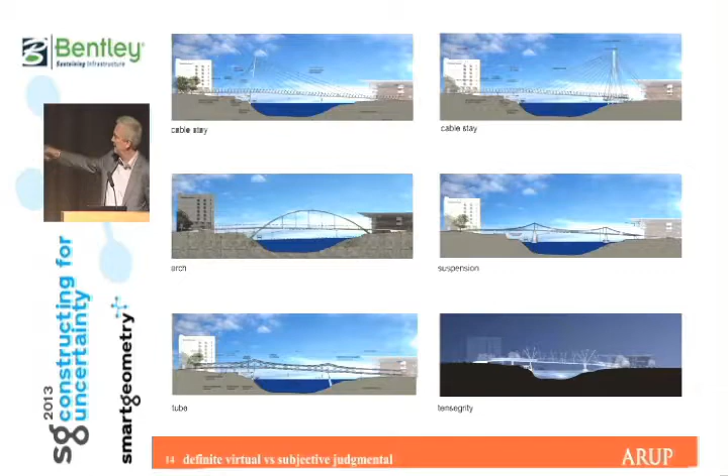So our team, Cox, Arup and Baulderstone Hornibrook, we looked at all these different options in front of you, and we said, well, it's a design competition, so we're not going to do the ordinary things, we're going to do something different. But we're going to do something different that is only going to cost $60 million. And we decided, because we'd been recently thinking about it, to do this tensegrity bridge, as we called it, on the bottom right-hand side. As a structural engineer, it's quite difficult to do something with tensegrity because it is inherently ineffective.

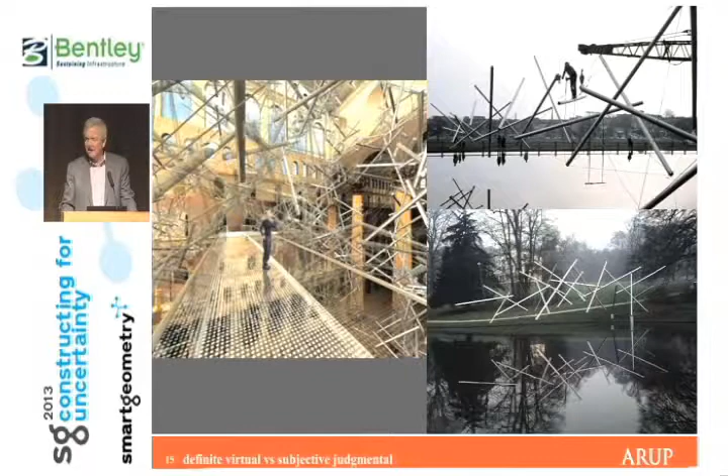Now, if you look around the history of tensegrity, you can see some sculptures, but that's about it. Because actually just getting a sculpture to hold itself up is pretty difficult. So it's a slightly odd concept to try and design a real piece of urban infrastructure with. So again, we cheated. The top diagram is actually our bridge. It's simply a cable-stayed bridge, using two pylons in the river.

But then we added a set of structure you can see in the middle of this diagram, which is a whole other set of masts and cables. And you could say, well, all you've done is decorated your bridge, and to some extent that's true. But it's not quite true, because we've halved the span of the deck from 24 metres to 12 metres, which reduces its thickness from about 1.5 metres to 900 millimetres.

And in modern pedestrian bridges, you have to deal with disabled access. So you get a ramp of about 1 in 20 to get up onto a bridge and get down. And if you save 600 millimetres in the middle, you save 20 times that bridge length at each end. So it's not the direct saving in the middle that we get from this extra bit of structure, but it is what we get at the end.

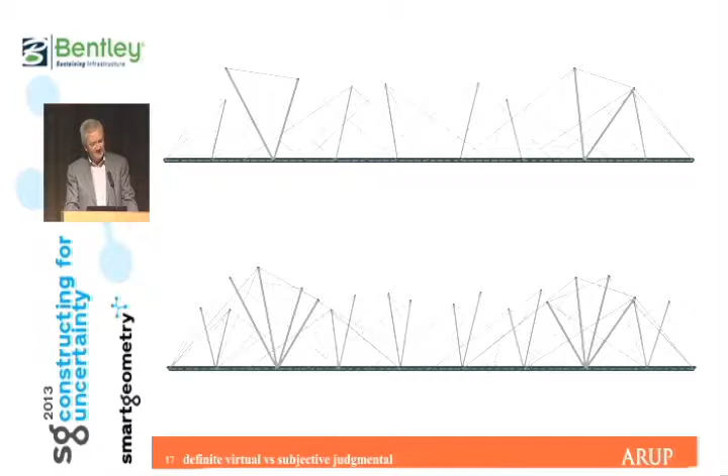The next step was we put the two together at the bottom. You can still probably see a regular pattern. You can see certainly where the cable stays come together. But if we go one step further and start using random numbers and inclining everything so it's not in its usual vertical place, your loss of efficiency if you incline by up to 15 degrees is about 4%, which probably doesn't change one tube from one size to another. So it probably doesn't make any impact at all.

And by doing different random patterns on each side of the bridge, which you can see in the bottom of this slide, you get a three-dimensional sort of fuzziness about it. You're now beginning not to see the major pylons compared to the major masts compared to the minor masts. So it's all sort of sleight of hand, if you will, here.

The funny bit to me is the only digital bit I did was during the competition. I wrote a spreadsheet that generated random numbers and used it to incline the columns and change their height slightly as well. And once I'd done that, we never changed them. That was it. There was no more digital exploration. It was done once. It worked. And we went ahead and built it.

There's a bit of pure tensegrity, which is there are horizontal struts that support the canopy to protect the people and also keep the mast stable in the other direction. Because the idea of tensegrity, for those who are not familiar with the work of either Buckminster Fuller or Kenneth Snelson, depending on who you think invented it, is the idea of compression elements floating in a sea of tension. So the idea is that the struts don't touch each other. And that's what actually makes it very inefficient.

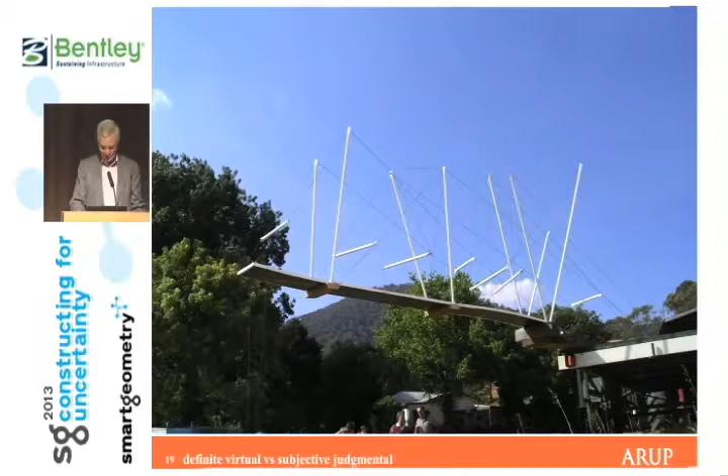What amazes me, by the way, is Buckminster Fuller persuaded the world that tensegrity was the most efficient structure on the planet, and he was going to construct whole worlds in the sky based on it. I still don't understand how the whole world thought he was right. It is quite an amazing confidence trick. He's a brilliant bloke, by the way, don't get me wrong. I just think that particular aspect of what he put forward was amazing. And we had done the same thing to some extent.

On our judging panel, working for the government, was a quantity surveyor whose job was to make sure that even the builder wasn't cheating and it really could be built for the money that the government wanted to spend. Now, this quantity surveyor looked at our project and actually decided it was the cheapest submission that was made. But he also decided it didn't stand up.

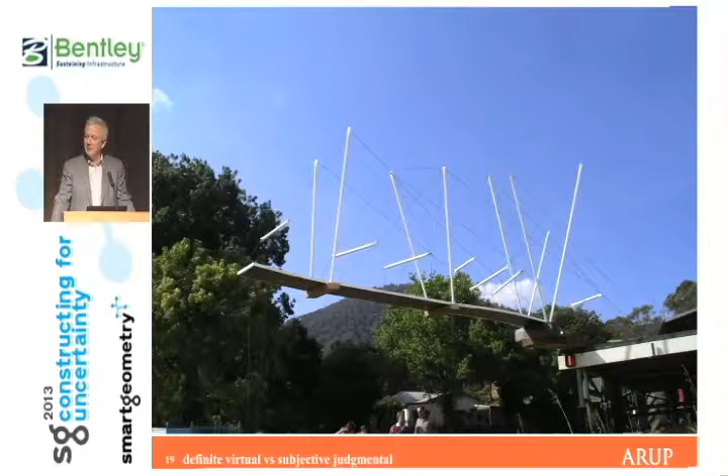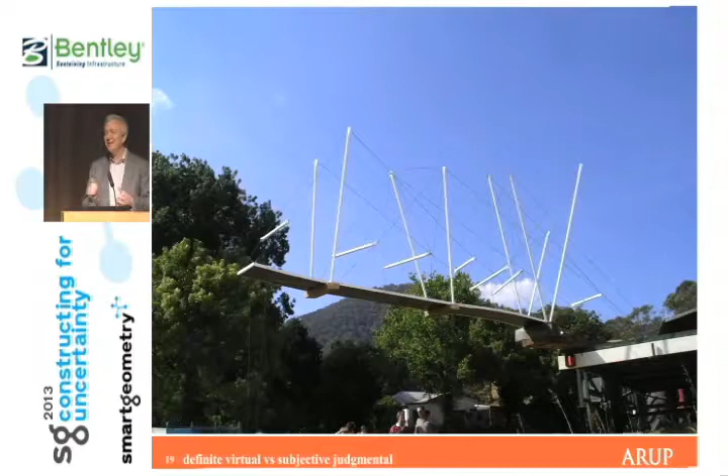Luckily the entries went in before Christmas and the judging was made after Christmas. And Christmas in Australia is a big summer holiday. So he went off to his hobby farm over Christmas and he built this model using his own money on his own farm to make sure that he wasn't going to recommend to the government to build a bridge that wouldn't actually work.

So it's the first time ever, I think, a QS has gone to such lengths in a physical world. So there's the bridge that we built. I think it's very successful. I think one of its lovely things is it polarizes opinion. I'm told that people on the CityCat, as they pass underneath it, they either love it or they hate it. They don't come halfway in between.

When it opened, it was the 150th anniversary, as it happens, of the first tall ships to arrive in the Brisbane River. And so you can also see unwitting references between what we constructed and the original tall ships. This is a sort of side point.

Almost everything I've been involved with since 2003 has had LED lighting using infinitely addressable colours and dynamically programmable. And all the pictures we take are stills, and they show it in some beautiful, calm lighting that the architect maybe first envisaged. Of course, anybody now can reprogram the lights and make it look as hideous as they want. And this is common now across a lot of buildings. There's a whole new profession required, which is providing the content, if you like, the artistic content for lighting systems.

So manufacturing, and it's a moot point to me. Will we manufacture buildings and assemble them on site? Or will we move the manufacturing capability to the site? The former is where all the action is that I see. We've got people like Unitized Building down in Melbourne putting together apartments complete and fitted out in the workshop. We've got Laing O'Rourke here, mass producing custom made concrete panels and assembling them complete with their services and putting up 40-ton pieces at Leadenhall, for example.

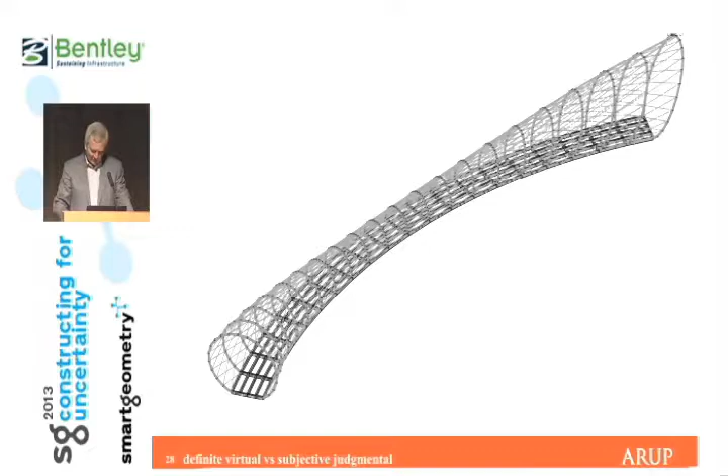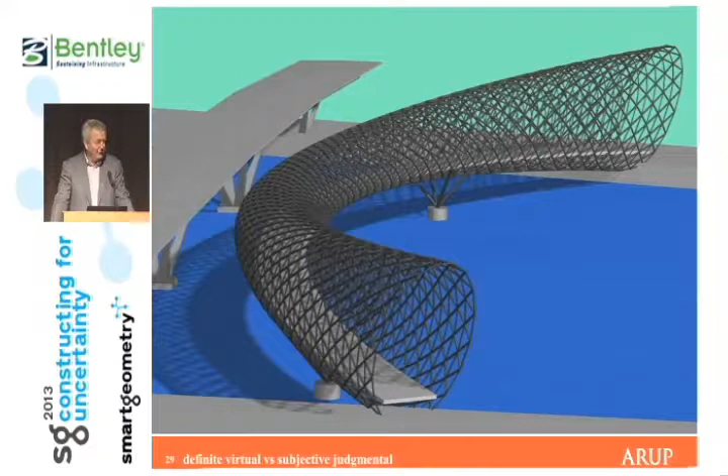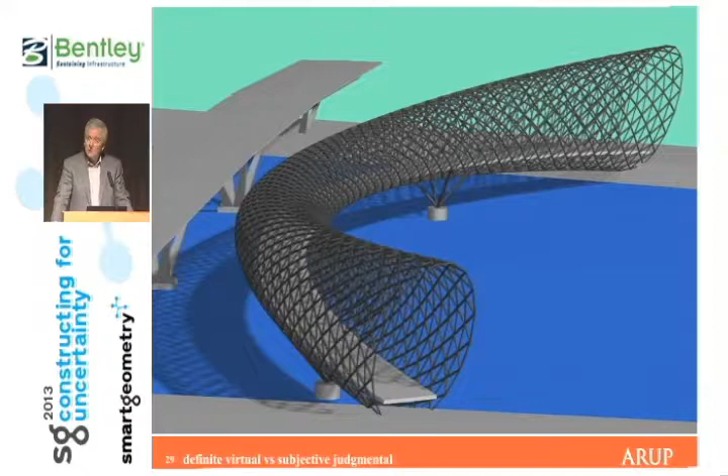So Philip Cox and I said, well, that's okay. We'll just make it out of a compression tube instead. Similar idea. We'll walk through a tube. You actually get into a structural conundrum when you try and do delicate compression tubes. If you make them a bigger diameter overall so that they're more structurally efficient as a bridge, they become very ineffective at the supports and at mid-span. At the supports they want to squash, and at mid-span they want to elongate. And therefore you have to make the members bigger to stop that happening. Or the compression elements want to buckle. All sorts of things happen.

So we added to our bridge 2 layers of cables inside it to keep it stable. So we had an external exoskeleton, we had internal stability cables to keep it round, to keep it circular. And we also made it grow and swell, which we thought was interesting. And we also thought it was a reference to a Malaysian fish trap. We thought it was a good cultural reference for a bridge in Singapore.

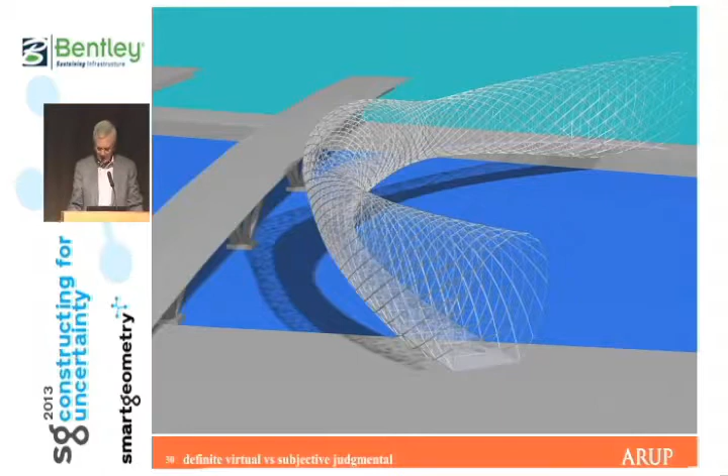But I'll never forget the day that we went to visit the 2 ladies, or particularly the one lady at that time, Dr. Koh, who was in charge of the Urban Redevelopment Authority, our client. And we presented this scheme, and she looked at us and paused and said, "Professor Cox, Professor Carfrae, why do you think Singaporeans want to be treated like fish? And if they should be treated like fish, why would they want to be caught in your bridge?"

And it was one of those moments, the scales fell away from both our eyes, and we thought, unfortunately, she's probably completely correct, because we have also managed to take a path where we've ended up with this overly complicated structure. The idea was to give people a good experience crossing a bridge, but they probably now feel as though they're in a cage, was one mistake. The second mistake is the Singaporeans are not necessarily the best friends of the Malaysians. In fact, the whole purpose of Marina Bay is to have a freshwater reservoir so they're no longer dependent on the Malaysian water supply. So we'd made 2 mistakes.

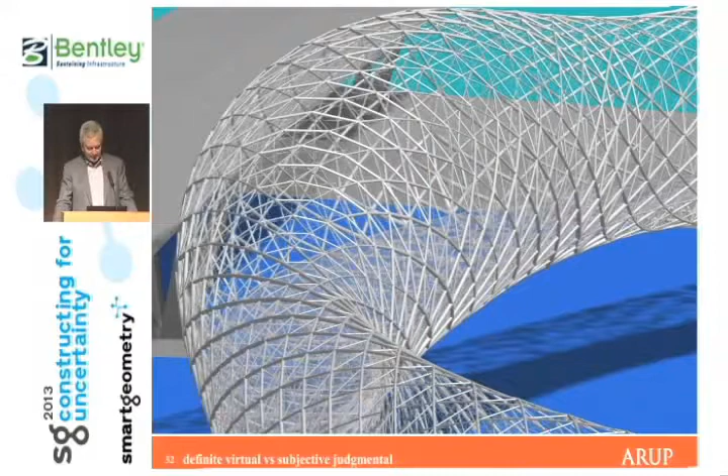So we said, okay, so how do we start again? What do we like? Where are we? Why have we ended up in this wrong place? And where should we go from here? And we both thought that what we actually liked were these elements of the spiral. The elements that went round the bridge in a spiral pattern were the most interesting. So you can see them here as they twist their way down the side, the face of the bridge. And so we said, okay, we're going to make a bridge out of a spiral.

But the only problem was that a spiral is not a structure. It doesn't work. If you've ever seen a slinky as a kid and stretched it out, it just droops between where you stretch it. So this is where I use the machine as an exploratory vehicle. The question here is now, can you make a spiral into a structure? Or more particularly, if you take 2 spirals, one a clockwise spiral and one an anti-clockwise spiral, and while not making them touch, can you interconnect them in a way that makes them into a structure?

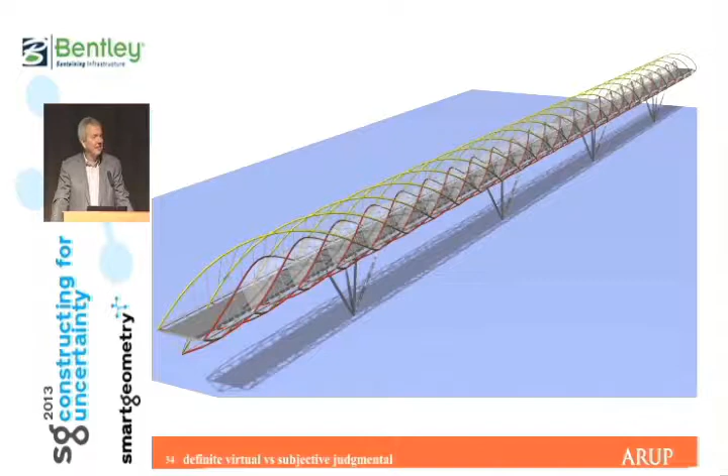And my head was only sufficient to say, possibly. And it's only when you play with this inside a virtual world that you find out whether it's really a possibility or not. And the good news was I did find after a week or so there was a way of interconnecting them.

And also that this double spiral bridge goes around a corner. And what's more, even when we went to the URA and said, we've got this brilliant bridge, but it might be a maintenance nightmare, they said, well, how do we stop it being a maintenance nightmare? And we said, well, probably make it out of stainless steel. And they said, how much is that going to cost? And we said, probably another $15 million.

They said, okay, because by then they were in love with the idea of a bridge that referenced DNA. Okay? This was now future-looking. This was about Singapore as a high-tech, biotech, looking to the future, having an impact on human life and so on. So in this case, that single idea, reference idea, allowed us to add $15 million to a budget of $45 million. Yeah?

And the bridge is now constructed, as you probably all know. There's a slight interesting bit of architecture here, that the bridge has some glass panels. It then has a bit with no panels, and it has some mesh panels, and then it has no panels and glass panels. Now, if you've ever been in Singapore when you've got the monsoon downpour, you might wonder why people want to cross a bridge and go wet, dry, wet, dry from end to end. And again, we have the LED issue, but that's the same as I said on many projects.

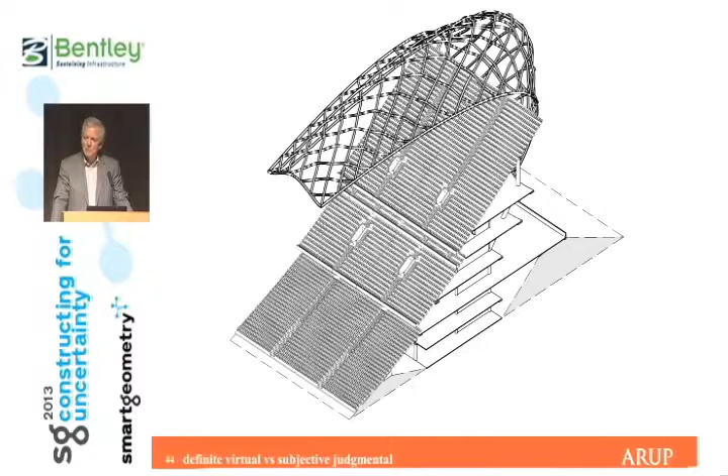Is this a possibility? And actually, it wasn't just Philip and I, it was Jay as well. I see down at the front here, 3 of us. And this becomes a very difficult thing to do because the collaboration has to be very intimate at this stage. The structure is what you see. And what you see is completely defined or constrained by what will work. Because what we were trying to do is make a structure in 3 dimensions out of one layer and use the shaping of that one layer as the item that worked as a structure.

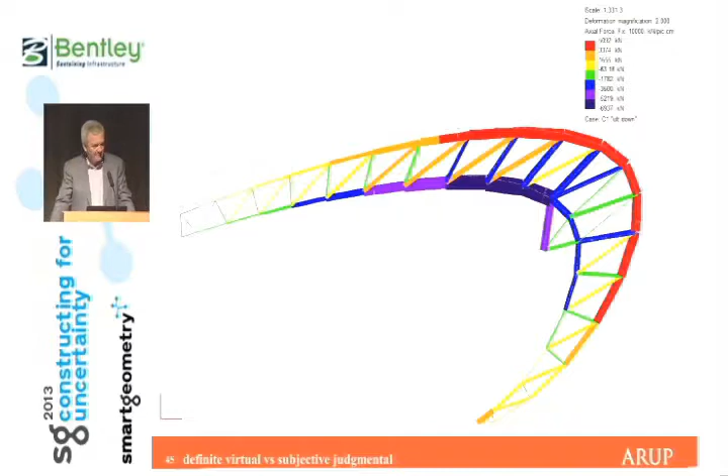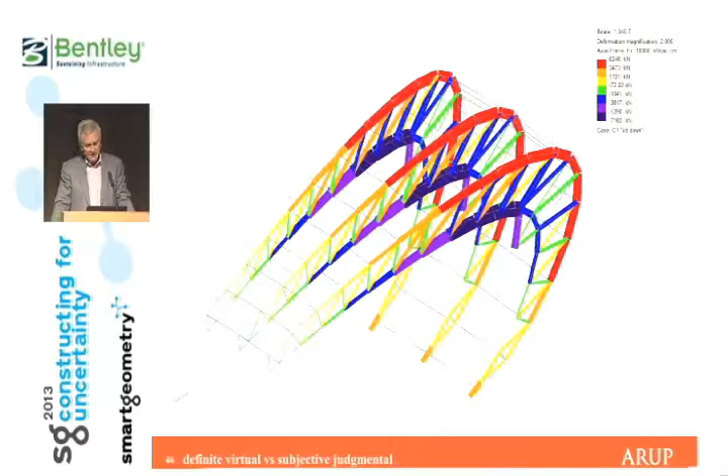So the more conventional way of designing a stadium such as this would have been to use cantilever trusses. And this is a structural diagram showing tension in the top of the truss, compression in the bottom of the truss. Or in 3 dimensions, you end up with multiple trusses. If you do this, you add more structure at the top to support the roofing, and you add more structure at the bottom to keep the elements stable, at which point it probably looks a bit of a mess, so you add a ceiling as well. And you end up with a 9-metre depth or so for this 70-metre cantilever, which is unusable space, if you like. It's where the structure is.

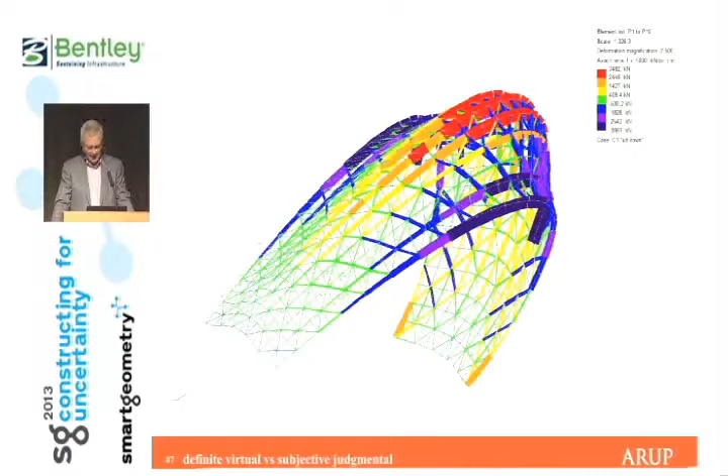Whereas if you spread that structure in 3 dimensions, you've still got a top chord, you've still got a bottom chord. You've got the same structural efficiency. You've only got one surface to clad. You have no additional elements to add for stability. And you don't have to provide a ceiling. And you can occupy the space in the humps, which was part of our brief, to be able to have a stadium that expanded to 70,000 for the World Cup and down to 50,000 after the World Cup.

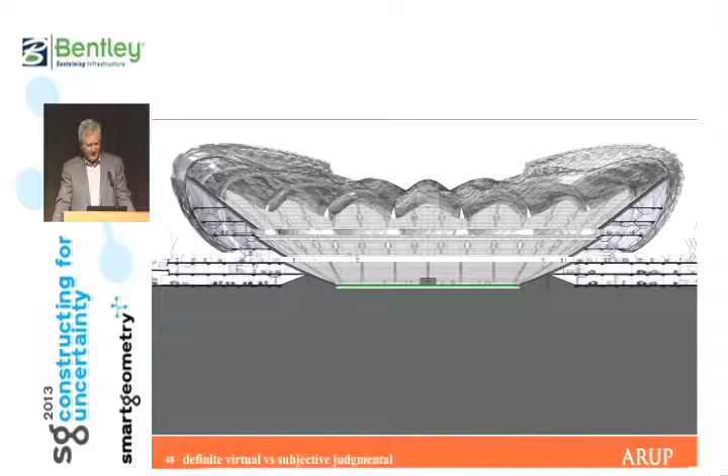So this was for Durban, for the Soccer World Cup, and we lost. It didn't get built, okay? But I still haven't given up on the concept, at least, and we'll show you one in a moment that works. This is the next stage, I guess, of the asset thing, is smart infrastructure.

This is where the Internet of Things allows you to have an infinite number of sensors and actuators in the built environment being controlled from the Internet. I'll leave it to you, really, to think a bit more about what the potential of that is. But it means we can match up, really, supply and demand in a temporal fashion.

We can get things to link together so that our energy is delivered to where it needs to be, when it needs to be. It's not being delivered to the wrong place. And that's really important in the concept of renewables, which tend to be a bit sporadic. So we've got to get better at matching up generation with requirements, if you like.

And the same goes for traffic. We at the moment have halved the cost of the Forth Road Bridge simply by saying you can use the existing approach roads by using intelligent transport systems and getting the maximum throughput out of what you've already got, rather than building new and bigger roads.

Next project is another stadium, and a real one this time. This is the AAMI Park Stadium, or the rectangular pitch stadium in Melbourne. The concept here of using these domes, again, was conceived of in our heads, if you like. It was a structure, it is a structure, it will work. But we went to quite a long length to then optimize it using parameters.

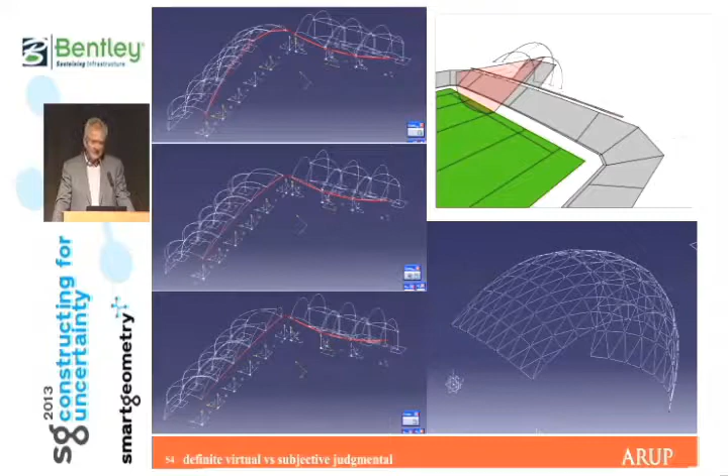So we built a model where the red lines on the left here are the things we control. All the rest of it follows from that. So as you adjust the red lines, you get a new structural form completely through a parametric model. But then we lift that model out every time we adjust it, make a structural model, analyze it, optimize the steel weight, see how efficient it is.

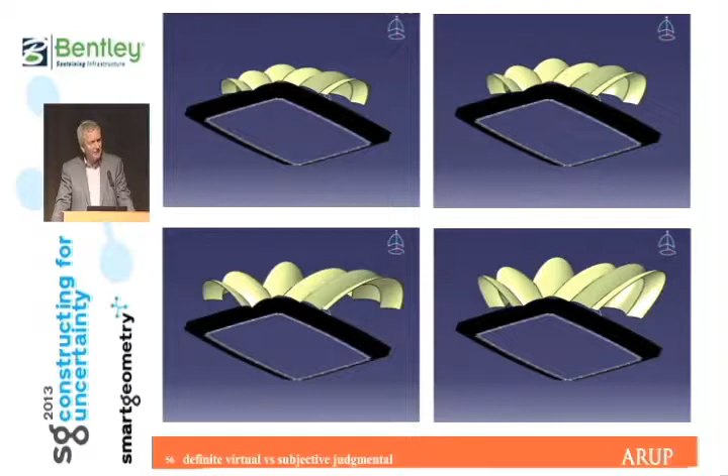We lift it out and look at it. Do we like the look of this shape? Is it a better shape? Is it a worse shape? We lift it out and look at the panelization of the facade. How much repetition are we getting of the triangular panel shape? So this is a three-element or three different dimensions optimization, but it's not automated.

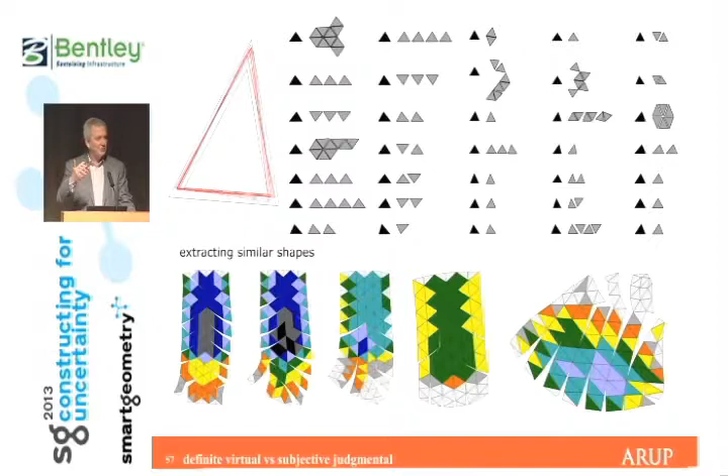And my experience has been I learn more when you don't automate it than when you do. Because the problem with automation is you have to know what you want before you start, if I can put it like that. Whereas when you don't automate it, you learn as you go along and you keep changing your approach, you keep changing your strategy according to what you've learned from the last one, if you see what I mean.

So in general, on real projects, I find that more successful. It probably just means I'm of an age or a generation or a mentality where I can't really do proper optimization. I'm not saying it's the answer, I'm just saying that's my experience.

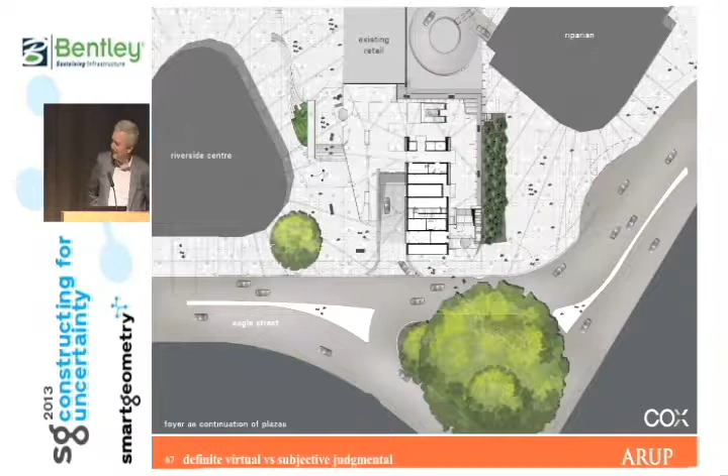Not only were we squeezing our new building in between, but it was all sitting above an existing operational basement. And in the centre of our site was the goods loading dock entrance, which you can still see, the ramp there. So if we weren't going to demolish a lot of the existing and rebuild it all at extra cost and delay and in an unsustainable fashion, instead we said, well, how can we make a new building that inserts itself exactly around the parameters of what already exists? And decided, yes, we probably could.

So the core is offset, at which point it no longer supports the building properly against wind loads. This is a 45-storey building. And we decided to put the perimeter columns where they most easily could penetrate the 3 levels of existing basement. So rather than disrupting the existing basement and car parking arrangement, we put the columns where they could be.

So we then extrapolated that and said, so if we start with a random set of columns, and we know that we want a perimeter frame structurally because the core isn't adequate because it's off-centre, then can we actually grow a set of columns up the building which will work as wind columns and also work as a pattern that interacts properly with this random set of starting points?

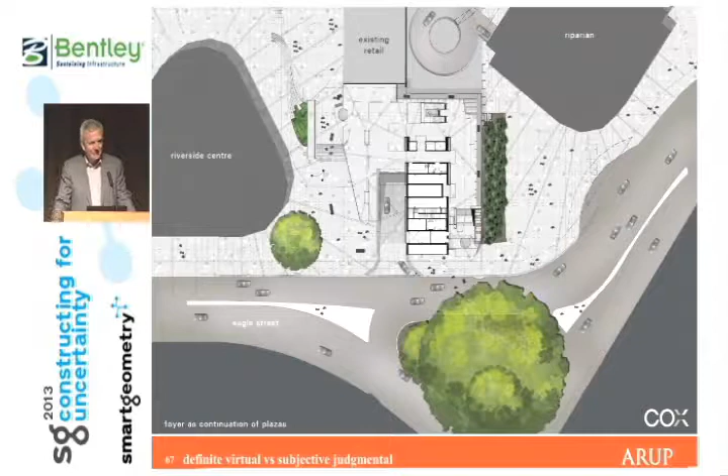I'm finding this quite difficult to explain, but basically we wrote ourselves a computer algorithm. We wrote and rewrote and rewrote. So we developed a computer algorithm over a period of about a month or so, where we grew a set of columns up the building, but we controlled inside the algorithm this time the structural efficiency of the outcome. So we distilled the idea of structure to a few different parameters.

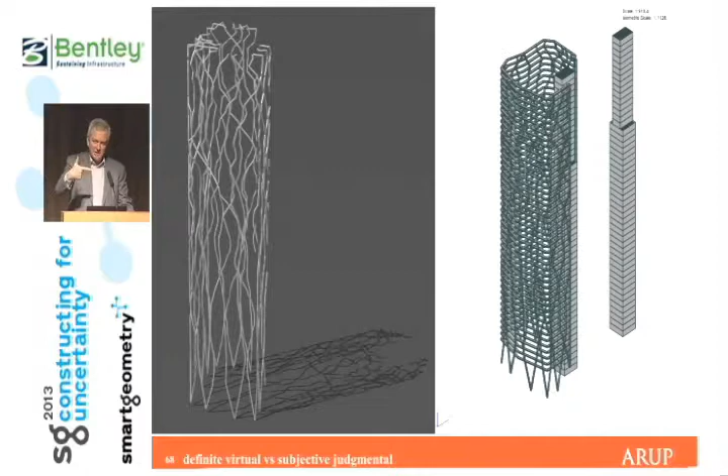For example, we said the columns need to lean at least 5 degrees at the bottom because the ratio of the gravity load to the wind shear is about 5 degrees, and therefore they will work effectively to support the wind load if they have that amount of angle. We said we want to maximize the spacing of a column at a slab to 8 meters, because the slab will efficiently span that far. We don't want a gap between columns that's bigger than that.

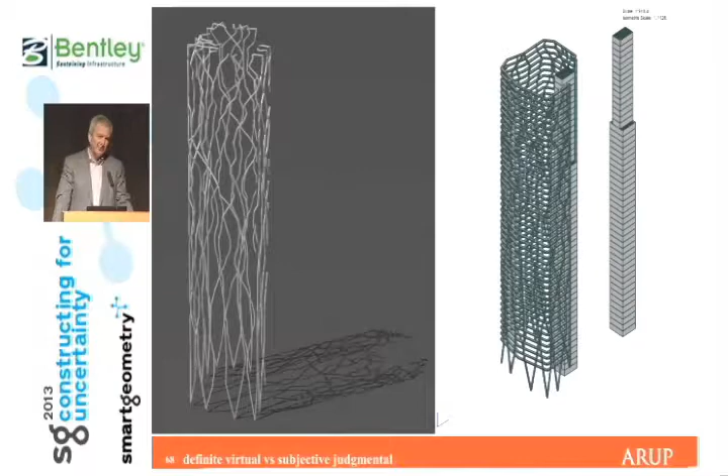Then rather than writing a really complicated way of trying to match these parameters, we simply allowed the program to generate random collections of columns, one level at a time from the bottom upwards. And it just carried on generating a random set of columns until it found one that met the parameters. It then moved to the level above and did it again.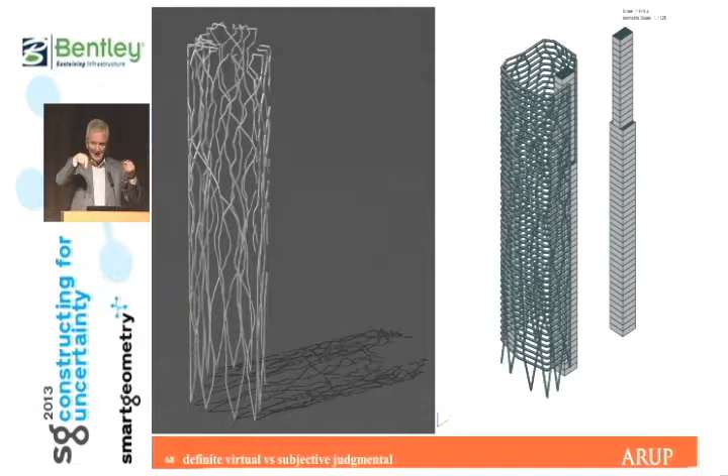And the third parameter, by the way, is that the columns had to be in balance. There had to be as many leaning left as right, and front and back and twist both ways, so that under a gravity load, it didn't move. It was still vertical.

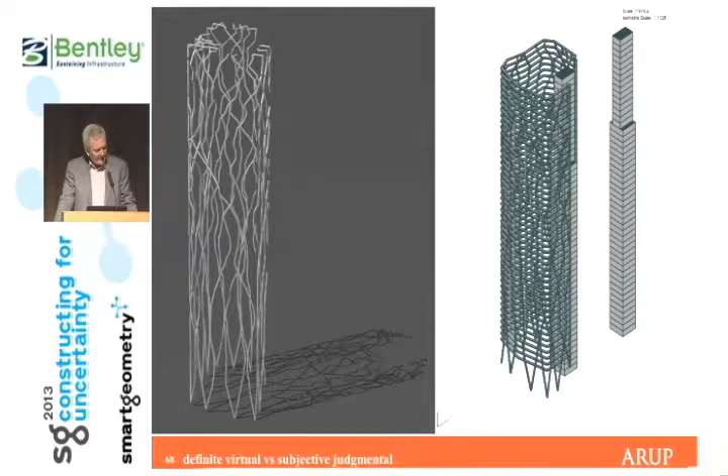What we found is that we just tightened up the parameters until we could just meet them. And we found that, in 2 million iterations or thereabouts, we ended up with 20 buildings that would work, that we actually grew all the way up and met the parameters from bottom to top. And then we just looked at them again and said, do we like it, do we not like it?

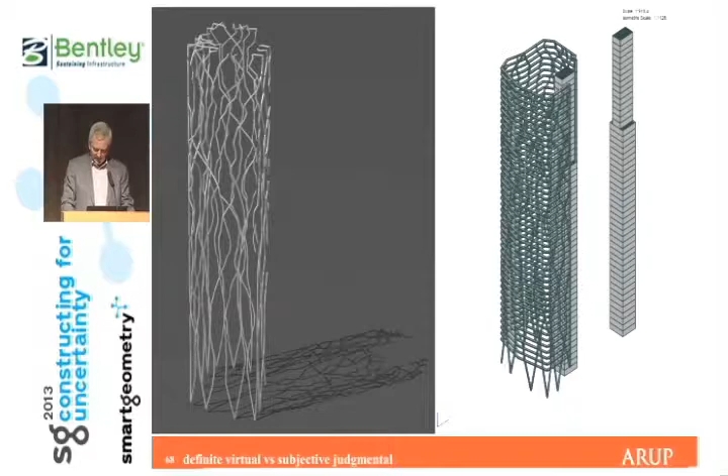And do we like this set of buildings, have we got the randomness right? And we therefore rewrote the script each time to change it until we got 20 patterns that were of the right flavor, from which we simply chose one, and again, we moved forward, and that's what we built.

It was also a wonderful coming together for me because we had generated the structure. There was only one definition of it, and so we managed to pass data between the engineering and the architects seamlessly because there was only one version of the truth, and another version wasn't possible, if you see what I mean. You couldn't just draw one because it had been generated in the first place.

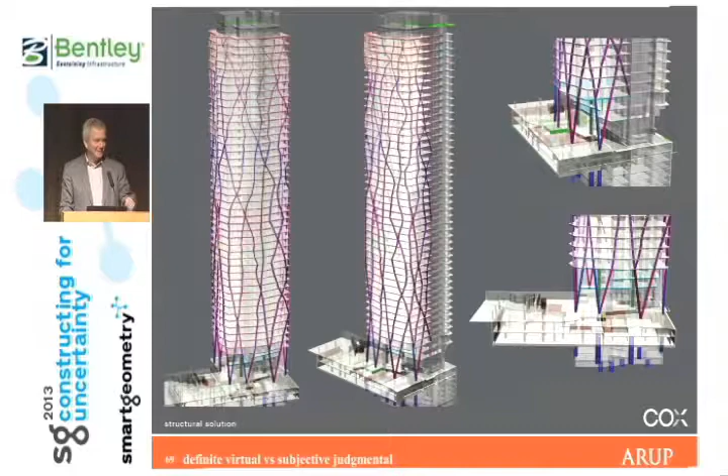This is proof for the engineers in the room that it works. The left-hand side is the gravity load. You can see all the columns are being used appropriately. The right-hand side is the wind load, so we've got simply a transfer across the building to the compression on one face.

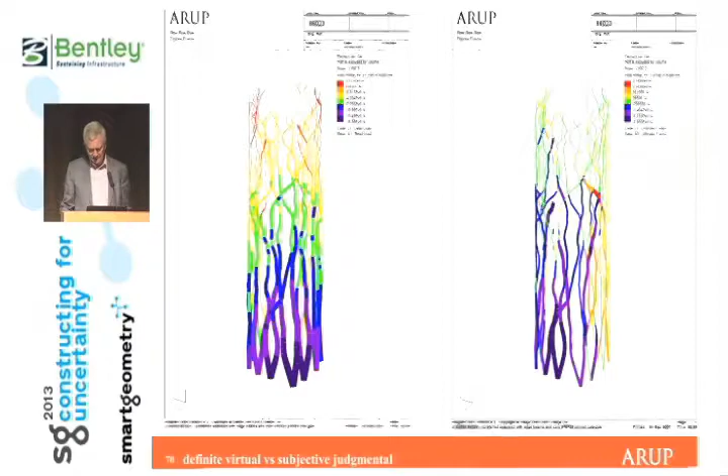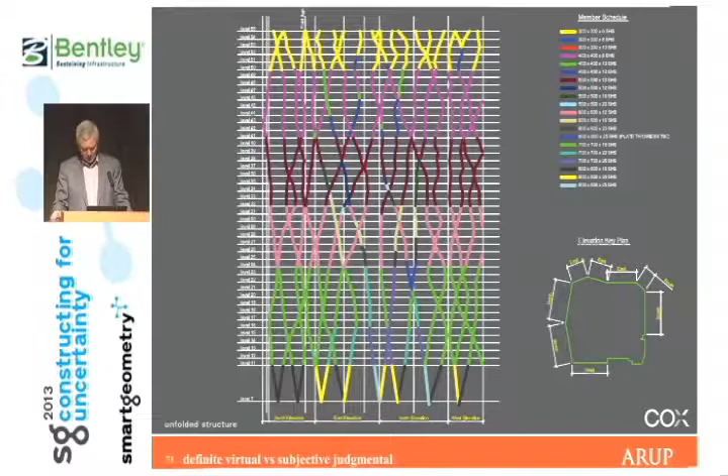This is the architectural version of the same thing. They've unwrapped the building and the different colours of the column sizes, so they move nicely from larger ones at the bottom of the building to smaller ones at the top. Larger ones, by the way, being only 600 square, smaller ones 300 square, concrete-filled steel tubes. Two Revit models side by side. First time we've ever done that, structural and architectural, and again, the information is the same.

And now, last year, we finished the building. It was the only high-rise building in Australia that carried on construction through the financial crisis. Almost every other high-rise building stopped. This one, which of course is exactly the right thing to do, because when it came onto the market, everybody was desperate for office space because nothing else had been built.

We played a lot of games with the pattern and the glazing to try and make sure we could see the columns both during the day and during the night, but without going to the large expense of representing them in the facade itself. So the facade is absolutely uniform, regular, modular, typical curtain wall, but the columns are still seen through it. So this is my last slide, and I think I'm about 1 minute overdue.

I was on a judging panel earlier in the week on Monday for the World Architecture News, looking at their competition to select 21 architectural practices that will have a profound influence on the architecture of the 21st century, 21 for 21. The criteria being you shouldn't have been in business for more than 10 years before entering this award. There were brilliant projects and brilliant bits of architecture that we looked at. But they tended to be brilliant in one or maybe 2 aspects of architecture, if you will.